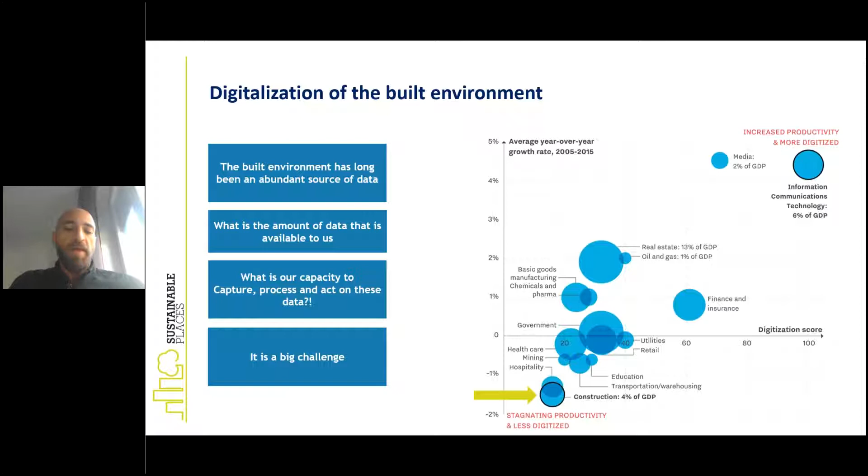And of course the European Commission is realizing all of this. So to tackle these digitalization issues, and also to achieve industrial leadership, they funded a lot of projects targeting these issues, especially digitalization and energy efficient renovation.

And today in our workshop, there are 9 of these projects, in the framework of the Horizon 2020 program. They are all funded to tackle and deal with this issue.

The first 90 minutes will be a presentation about the projects, and then we will go through some of the state-of-the-art tools that are developed within the projects.

And then we will have a round table discussion, where you can also participate as well with questions.

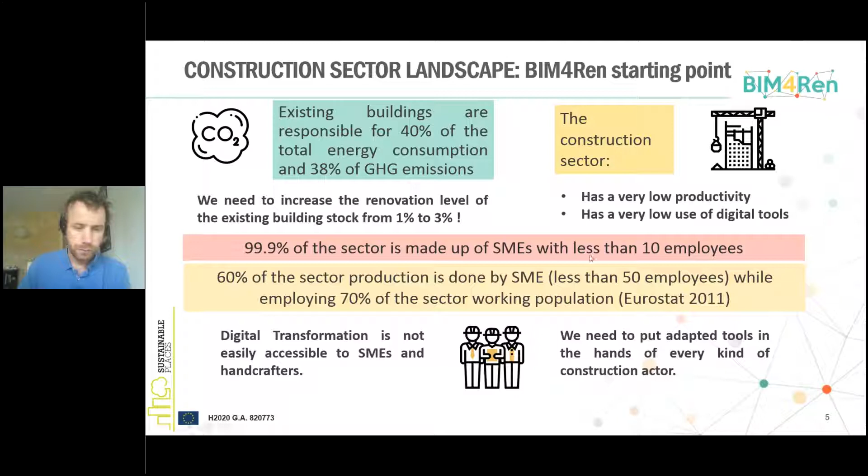And then the construction sector, as said, has really low productivity, low use of digital tools and so on. So for sure, we need to provide those kinds of tools, especially to those companies, to those handcrafters. So we need to put adapted tools in the hands of those kinds of construction actors.

And BIM is clearly one huge potential to trigger this digital revolution. And here, you'll understand that we consider BIM with its two main definitions: first, as this collaborative process to design and manage a building, and then also as a way to represent information - the information that describes the building as it is, as it was, as it will be. So it should allow for more efficient, collective, and integrated design amongst all stakeholders.

So now our concept, pretty short and pretty simple. For all renovation projects, we'll start by an existing building. There's still a lot of information to go either off-site or on-site, but to collect this information about what year it was built, what's the local regulation, what's the current energy performance, geometry, and so on. So we need to collect this information.

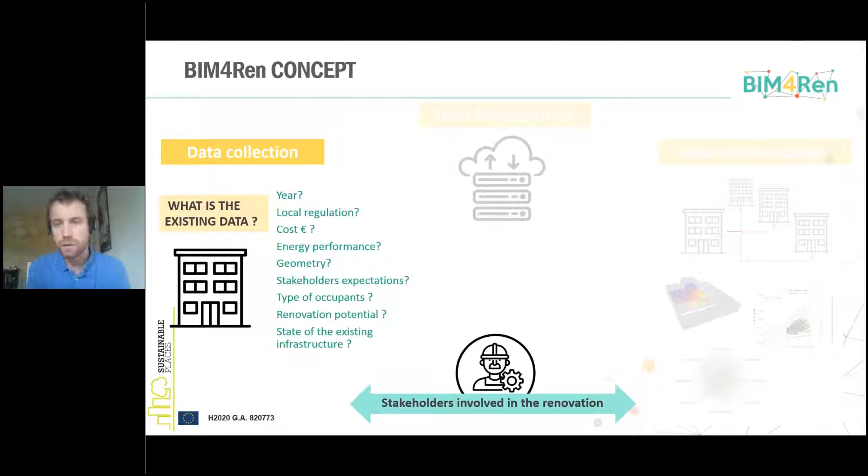Once this information is collected, along the project, we need to manage this information. So we need to create this BIM model. We need to organize it, we need to secure it, and then to allow for its exploitation.

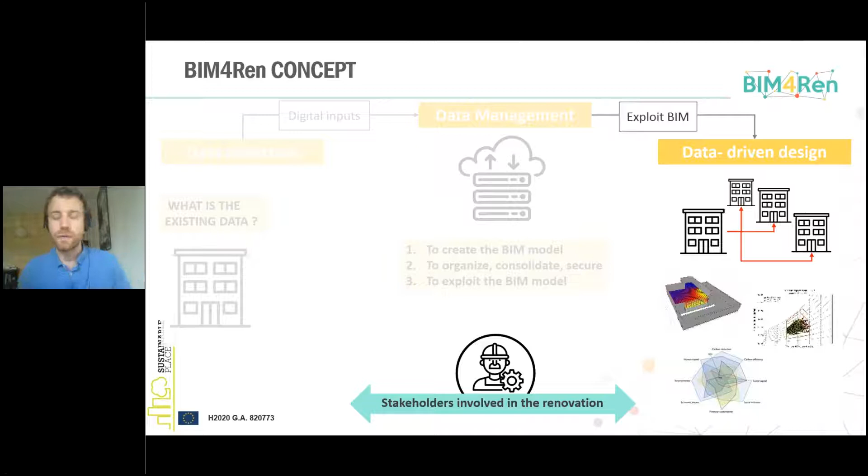And this is a third main step, which is about data-driven design, where we are going to contemplate different renovation scenarios and assess those - and not only just provide a bunch of information, but how to present it so that it helps in the decision making.

So what we want to do is not so much about providing one single tool or just a series of tools to be used, but how to provide access to those tools to a potential user. So in the project, we have more or less 32 developments, categorized along those typologies of data collection, data management, data-driven design for different kinds of services.

And also important is the fact that some of these tools are free, easy to use, while others are clearly more for experts and not free actually. So a wide range of tools.

On top of this more general analysis, we have three specific use cases, one in Spain, France, and one in Italy, which are quite complementary by their sizes, by their typologies, but more importantly by the stakeholders in the project related to this.

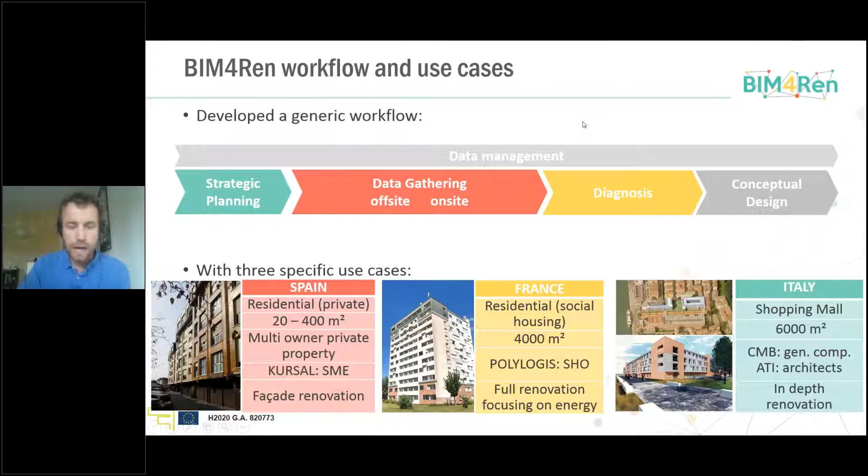So quite complementary analysis. I'll go really quick again as a way to open the door of this conference. If we follow this workflow applied more or less to France, this is how we try to work.

For strategic planning, we have some tools for managing a building stock portfolio. Then for data gathering, in the case of France, we can use a tool called MassDOC, which allows us to exploit existing information, mainly textual information—reports, revisit reports, or documents delivered once a building is built.

So how to scan, extract, and organize this information to identify useful information—this is one of the tools. And then another one is WiseBIM.

Based on 2D layouts, using AI it will elevate this 2D layout into a BIM model, which is enriched. It will automatically recognize certain types of systems, BIM objects, and so we have this kind of information.

Those are two examples, obviously some other inputs coming from different stakeholders. And one other tool, linked to one of the demos that will be done afterwards, is the LOD Lifter, one tool developed by CSTB that will manage the data.

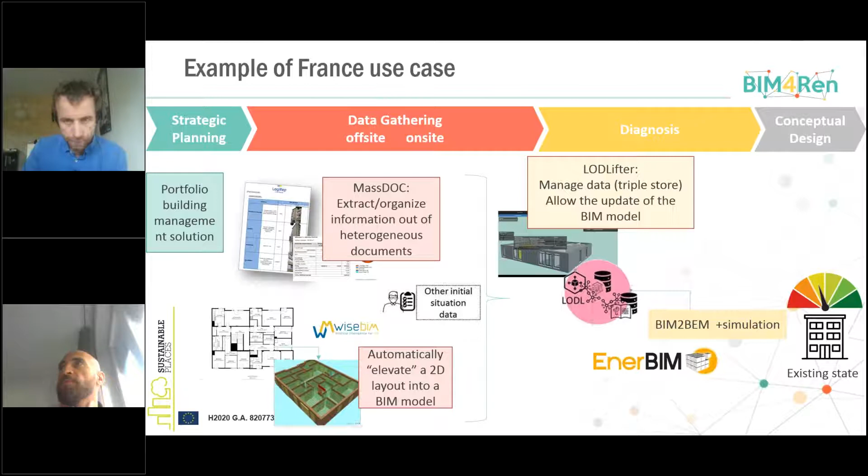So if I put all on the left, and then we consider the design phase, we have complementary inputs such as what can we consider for the renovation. We define the potential modifications, the potential renovation scenarios, which then create a series of simulations that will be run.

In our case, one of the main tools we use is ISVE, coupled with multi-criteria analysis, and also one key aspect with strong consideration to interface—how to retrieve, how to display the data to the decision makers.

So this is more or less what we are trying to do, and as a way to conclude this introduction—this isn't specific to BIM4Ren, but one of the barriers is that IFC as it is now, without entering too much detail, we all know there is information that we cannot store.

So either everyone creates their own models, or this is one first discussion point about extensions and barriers, and how to exploit, for example, ontologies and linked data as one possibility.

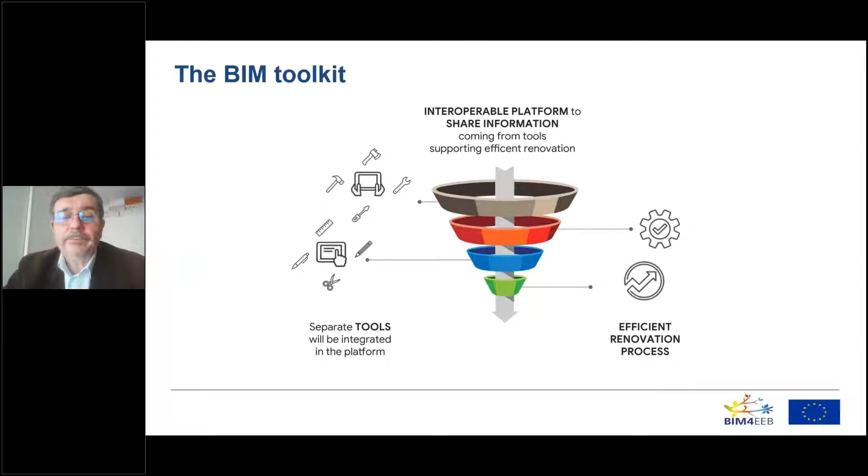So the set of tools is dedicated to the survey for fast mapping of existing buildings, not only for the geometry, but also for the equipment, the lines, and so on in the walls and the technologies.

Another group of tools is for managing automation, building heating, ventilation, and air conditioning information with BIM, and tools for energy analysis, BIM analysis, in order to manage energy information throughout the whole process. Another group of tools is dedicated to construction planning and tracking in order to manage interventions on the buildings.

This involves the facility manager, asset manager, and operators in the management, and on the other side, the involvement of the inhabitants to manage the occupation of the spaces, of the rooms, and for the energy and comfort analysis for performance evaluation.

At this moment, we have developed in phase one the definition of requirements based on the involvement of the chief stakeholders, a big group of construction and service companies, designers, owners, and inhabitants. On the other side, we have developed strong research about linked data and ontologies in order to be used in the management of data throughout the process.

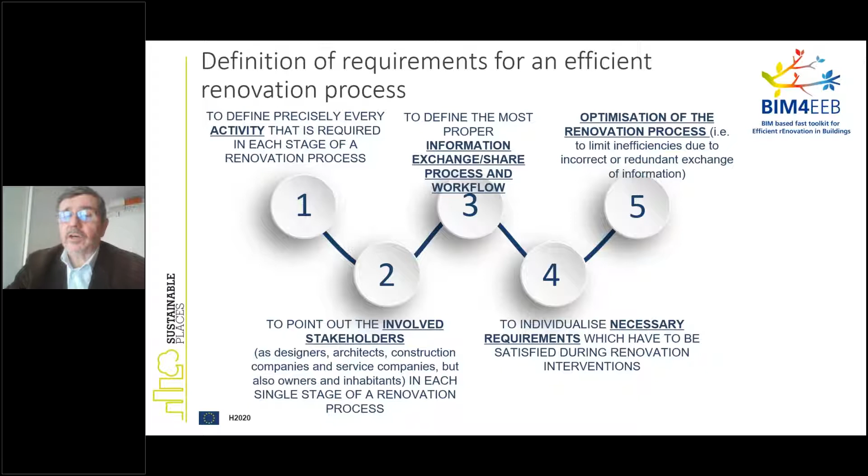And the result is already published as public deliverables on the website, in the form of tables and flowcharts, with involvement of stakeholders and comparing the public and private situation for residential buildings.

A particular specific result is related to the development of the digital logbook, in order to manage all the information for the management of the asset, involving all the information which is needed for the management. And this is the basis for partial enrichment of the IFC files in the BIM management system.

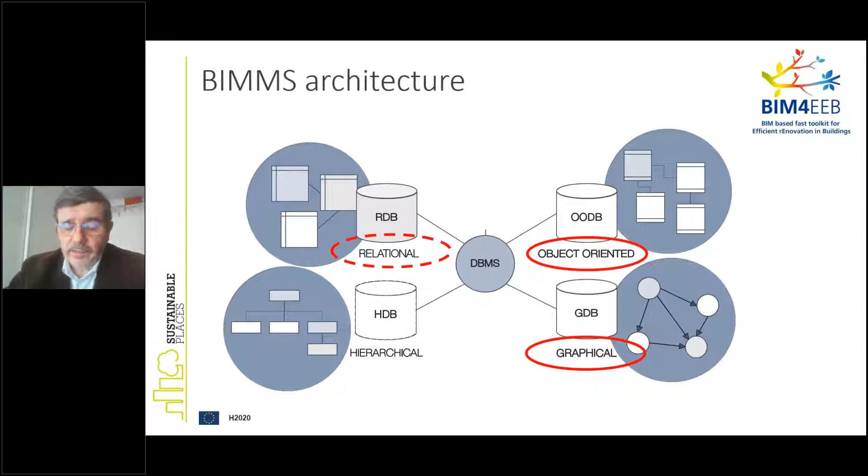The BIM management system has already been developed and is linked with our website, and of course object-oriented with graphical information, but relational, involving ontologies and linked data. And a strong effort is about the standardization.

So the involvement, starting from the Italian UNI working group of BIM, which is involved in the activity of CEN 442 and ISO, managing the information with particular attention for common data environment in agreement with new standards, ISO 19650 for the common data environment. And this is the development up to now.

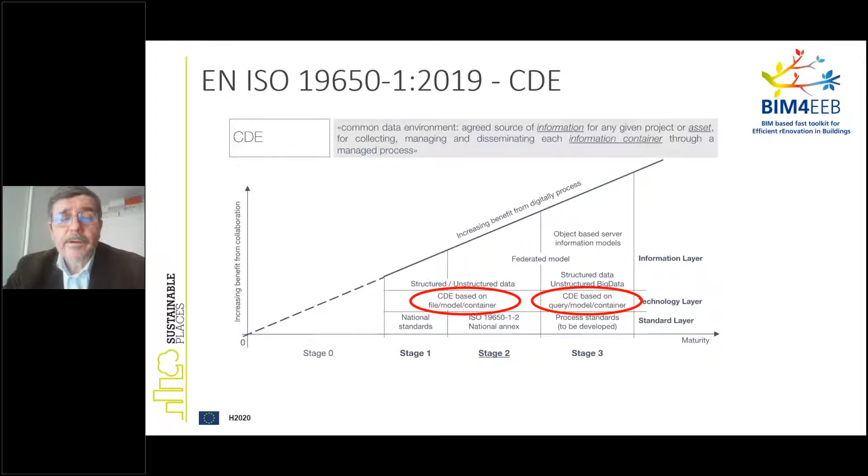And what is now the toolkit is managed by the BIM management system, involving different tools for fast mapping, for planning the activities, the involvement of occupants, BIM for occupants, BIM for energy aspects, Auteras and BIM-CPT for plant and equipment information. All information is given on the website, and if you need more information, there is the email.

And tomorrow we will have the conference of our project in Sustainable Places, and everyone is invited. Later, we will see a video showing the BIM management system in action. Thank you, everybody.

Thank you, Bruno. Very interesting work, especially about the logbook and the standardization. We will speak about this maybe later in the round table. Now I will give the control to Timo, who will speak about the BIM Speed project, which is also a sister project of BIM for Ren and BIM4EEB.

Right, you should have the control now, Timo. Do you see my screen? Yes, okay, perfect. Let me go to the presentation and start it. Oh, need to move that control thing. So now the presentation started, I hope.

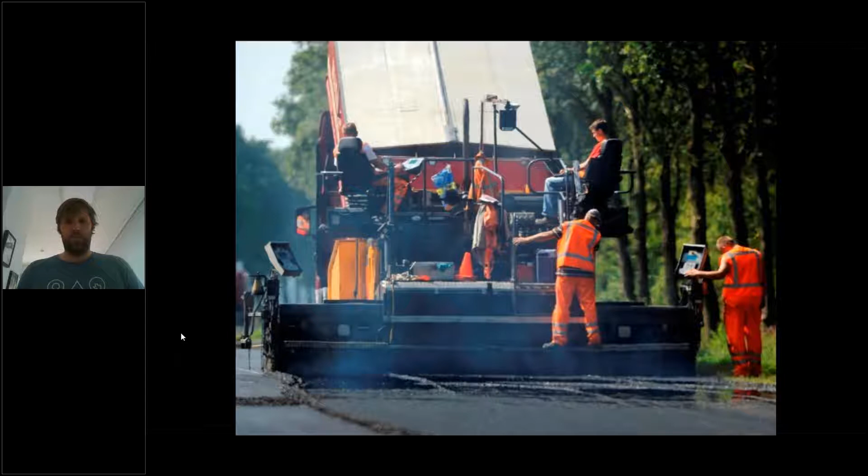And then, of course, there's a lot of work to do because the BIM speed highway is not paved yet. So in the first two years, and probably continuing in the next two years of the project, we spend a lot of effort paving the highway itself. Our major tool for that is the BIM Speed platform.

The BIM Speed platform is based on the French Kroqi BIM platform, and it is really a central repository for all the information. You can store all types of information there, files, and we add new services, so you can actually build services on top of it. Down in the corner you already see a couple of services, and it has an open API. The idea is that we can build up this platform along the project, and then allow smart and innovative software companies, including our partners, to tie in their BIM tools. The Kroqi platform, or the BIM Speed platform, will in the end provide this information highway where all different people who have tools to integrate, all users of information on the project, can tie in and manage all this information to get a smooth ride.

And then, of course, we need to kind of concert how people race on the speedway. So we are working on creating general rules, and also tying other things into the platform that can concert all the information around it. At the center you already see the buildingSMART sign, so we of course use the IFC standard, but around this IFC standard we're developing different ontologies, like the RenoInst ontology, thinking about the knowledge you need to install components; the LCAC ontology, where we want to formalize the knowledge you need to do a real LCA/LCC assessment; and the BIM Reno ontology, where you need to think about energy modeling and what you need for it. On top of that, we are integrating existing standards, ontologies, frameworks and databases like CityGML and gbXML. We have integrated different weather services, which is of course very important for energy simulation. We integrated ThingSpeak and an IoT platform into it, and in the end we also provide guidelines and a BIM passport for projects, which can track the information you have for a project over time.

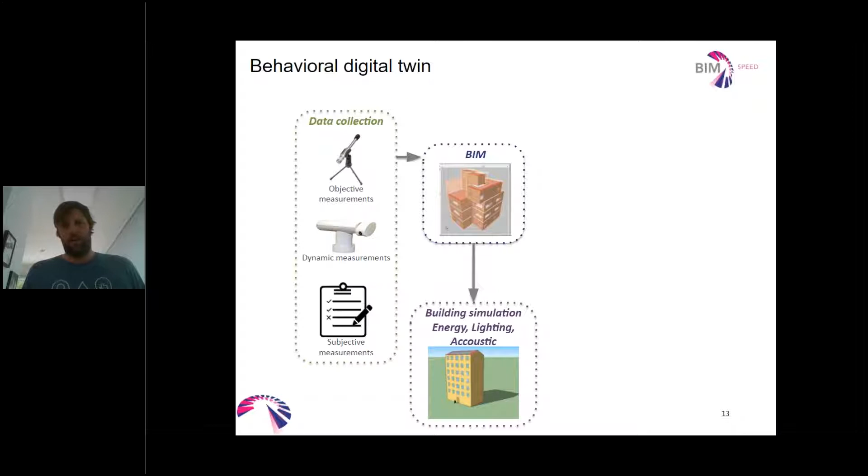Most digital twin approaches do that, but on BIM Speed we move further because we link this to building simulation energy - and by building simulation we mean not only energy but also lighting and acoustic simulation. This helps us understand more about comfort, essentially creating a digital twin based on a building simulation model that is calibrated according to the data. This allows us to digitally twin the behavior of the model, and then do predictions that help develop better renovation scenarios, and provide evidence during design phase on which scenario will have the best impact on the building.

A couple of things we're going to do as we move forward. This is mainly all research work done, and in the second part of the project we want to move more towards innovation. One thing we want to start, and hopefully it will be big and work really well - in 2021 we want to start our BIM Speed competition.

The BIM Speed competition means we want to have projects that renovate, use BIM, show how they use BIM, illustrate how they use BIM, ideally use our tools, and they probably must use our platform, because we need to collect data from them to rate them. This will be open for all organizations and building projects in Europe, and we hope we can make a big impact.

It would be great if you want to join the competition - we will announce it widely. If you want to understand more about the project, go to our website. If you want to stay engaged, register for our stakeholder community. And if you have questions, you can always contact me. Hopefully that was a good first insight introduction to the project. Thank you for listening.

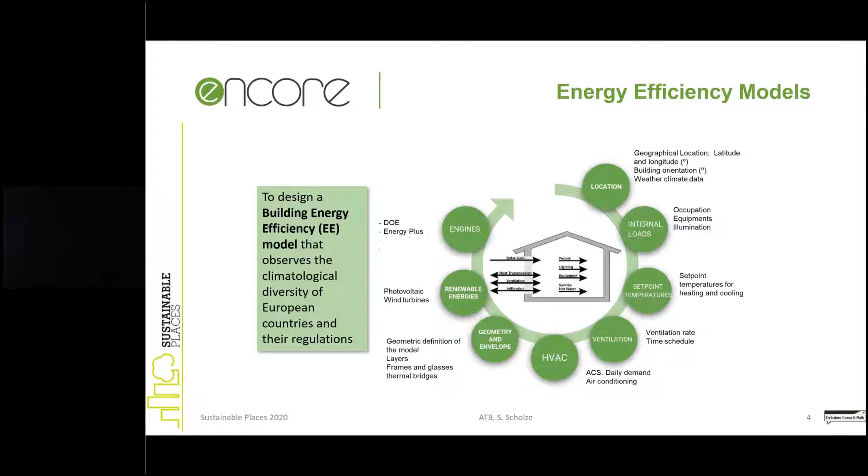Similar to the baseline, we see that we need comfort models. Comfort is really something subjective, but the objective is to design a comfort model that also observes diversity in European countries, taking into account indoor air quality, thermal comfort, acoustical comfort, visual comfort, and energy efficiency. Especially thermal, acoustical, and visual comfort are very subjective. This means there's a clear need to involve real dwellers in order to be able to make such simulations.

These models we see as a baseline for the tools. When we look at the BIM Cloud-based solution, the objective is to design a BIM Cloud-based solution with features and services for all stakeholders in the renovation lifecycle of projects.

What does this mean? I think most of us know the key problems. The key problem is data acquisition in the beginning — often you do not have a BIM model, and it's not too easy to create these models. Therefore, we have tools for data acquisition, surveying with LiDAR and photogrammetry, automatic semantic segmentation and classification, and then tools to generate such BIM models in an automated way, and tools to enhance such models with additional BIM resources. And of course, as I already said, energy efficiency and comfort simulations.

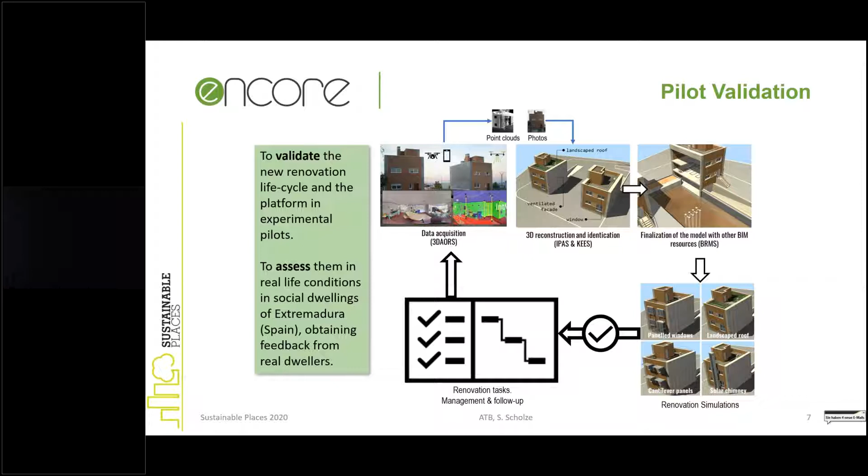I wanted to go into a bit more detail into one of these applications — data acquisition using LiDARs, and how to create an IFC BIM model based on these point clouds.

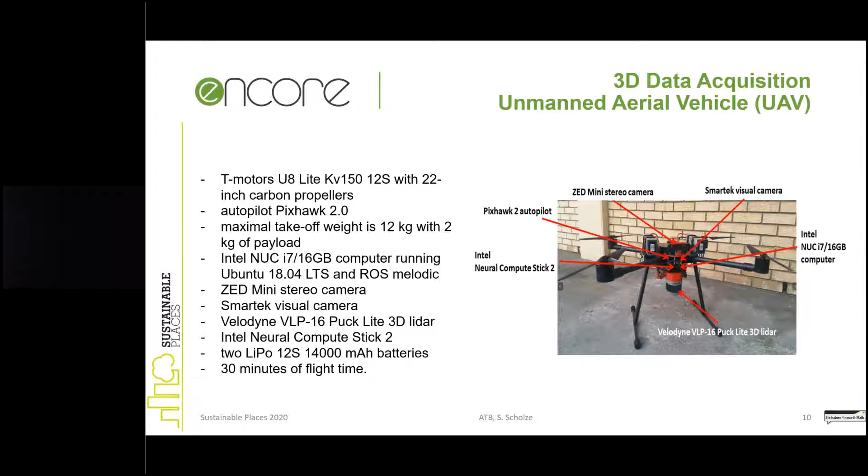With this drone, you can fly around the building to create a point cloud. Here you can see a screenshot example of how this drone is manually flown around the building.

And now I hope that this is working. Can you see? I hope that you can see the video. Maybe one can quickly confirm this. No, we cannot see the video. Oh, you cannot? Okay. Can you see it now? Oh, you can? Yes, yeah.

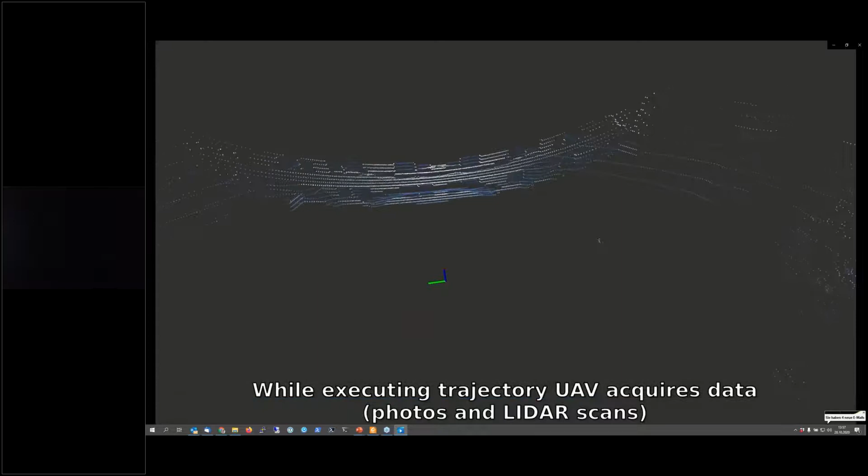You can see here that the drone is flying around the building. While the drone is flying, the UAV acquires data — it takes photos and LiDAR scans. Here you can see what this point cloud looks like, and you can see the drone flying around. This data is saved on the drone, and after the flight we can extract the data from it. You can identify the building, but you can also see that this is still quite far away from an IFC building.

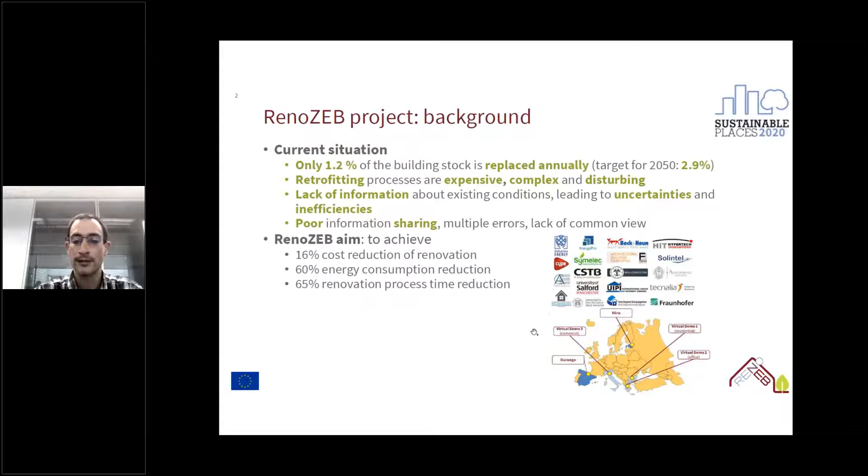So what the project aims to achieve is these figures here in cost, energy reduction, and also reduction in time in the renovation process. To do so, this consortium has joined the project. This project is not only about software or tools, but as you can see here, the proposed solution is oriented around 5 points, which can even be reduced to 4.

One is the process, to define a decision-making methodology. Then with that, to develop plug-and-play envelope solutions for renovating real buildings, which we apply in real demo cases. And then development of different software tools for simulation, monitoring, and knowledge-based systems, which all collaborate around a central cloud platform, the RenoZEB collaboration platform.

One key aspect is to develop solutions that provoke the lowest disruption possible - plug and play products for the facade, that should be easily replicable and adaptable to different markets around Europe. One important thing is that the renovation should increase the property value as one of the main KPIs.

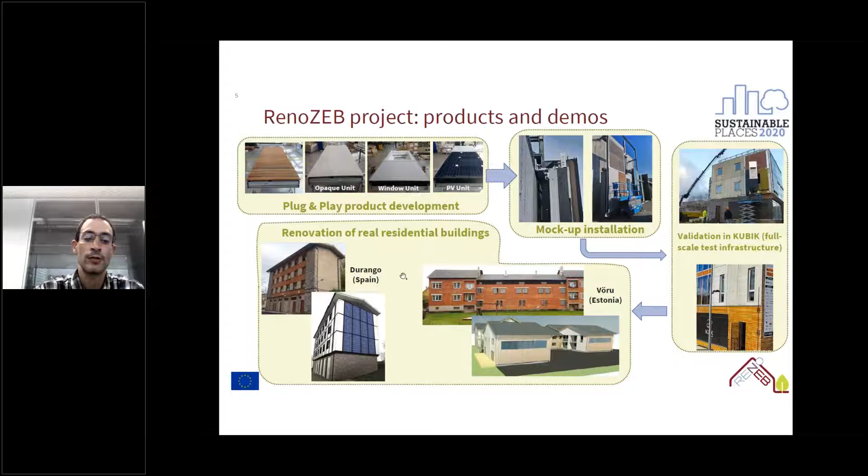We can see here the products and demos we have developed in the project. We have developed different units for the facade, some opaque units and some units with built-in windows embedded, even with photovoltaic units provided by several providers like Focchi in Italy or Bach Heun and other providers in Europe. Then we have made some mock-up tests in laboratory, and in a real scale building we have at Tecnalia, the KUBIK facility, and they are tested in 2 demo sites in Durango in Spain and Võru in Estonia. That's more or less how they will look.

About the tools, all the process is triggered or managed by different sets of tools. CYPE is a software provider in Spain which has provided tools for the different steps of the process. Starting from the acquisition with the point clouds, they provide a tool called IFC Builder to create a BIM model based on this data. Then a configurator which, on top of the BIM model of the existing conditions, lets you easily draw and configure your solution with the available products developed in the project. And then the different simulation tools like CYPETherm, budgeting tools, job control tools, and so on. So we cover the full range from data collection to logistics.

Then we have here also a knowledge-based engine, which is still being developed. The idea is to support in early stages decisions about which is the best option for renovation of the building, and how the value of the building could increase, by analyzing huge amounts of data like climate data in a given location, or EPC certificates that in some countries are also available to query online.

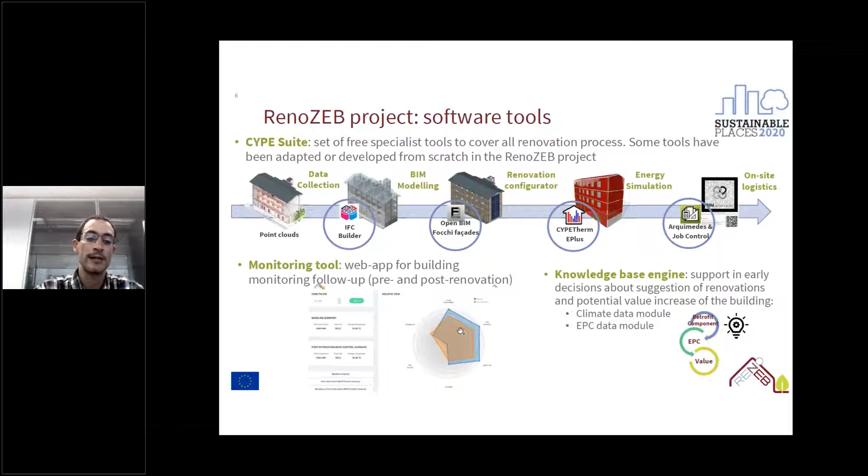So making all this data available, the knowledge base suggests some scenarios or some renovations. And then a monitoring tool which allows you to follow up with some sensors the renovation and compare the pre and post situations and all the gains or savings in different KPIs. All this is coordinated in the collaboration platform, which is developed by Tecnalia.

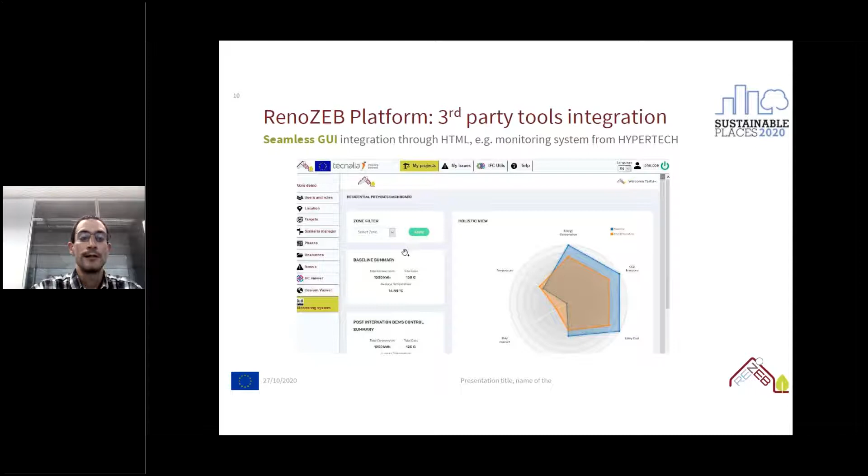And with all this information, we can create different scenarios. It's quite similar to the previous presentation: we can make a ranking or select which are the preferred KPIs for the project, and depending on the ranking, some scenarios are scored best or worst.

In order to make this communication, apart from the REST API, we have developed interoperability between IFC and simulation tools. The CYPE tools are based on an internal engine based on Energy Plus. They take the IFC, run the simulations, and then we have routines to read back the results and merge the high-level simulation results back into the IFC, to visualize them in a more intuitive way.

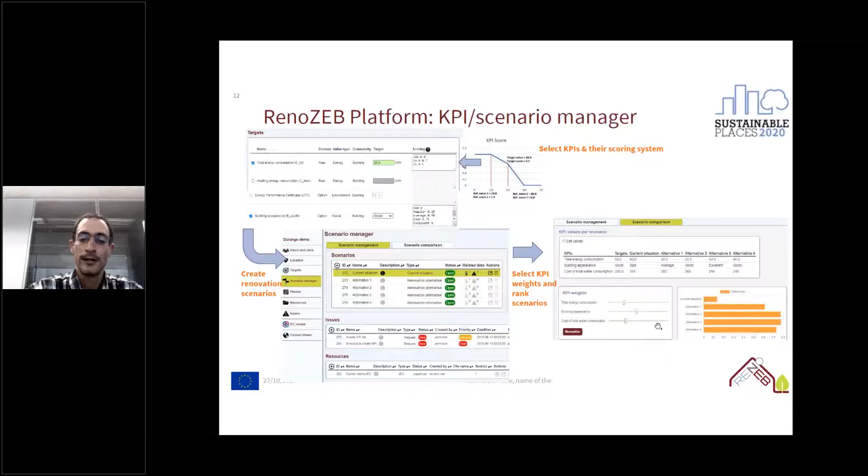And then, in order to compare KPIs of very different natures, for example consumption with water or with appearance, we have a method for normalizing all these KPIs between 0 and 1. So the consumption is normalized between 0 and 1, following a configuration that can be done by the user in this interface. You can tell which is the best possible value of the KPI and the worst one, and even all intermediate values, and according to the results, the normalization between 0 and 1 is made here.

This is also the same viewer here on the left. This is a zoom of this IFC viewer. It's an embedded IFC viewer in the web. We use WebGL technologies and JavaScript technology, so you don't have to install any plugin. We automatically import IFC models.

We can even create IFC models from a district scale and make queries. We have interfaces to query different properties in the IFC. For example, select or paint in red all the spaces where the use is not residential, or where consumption is higher than 100. So you can make visual queries in the model.

Or even compare, joining in the same viewer two or three or more different models, like the building as it is and the building after renovation, and compare them.

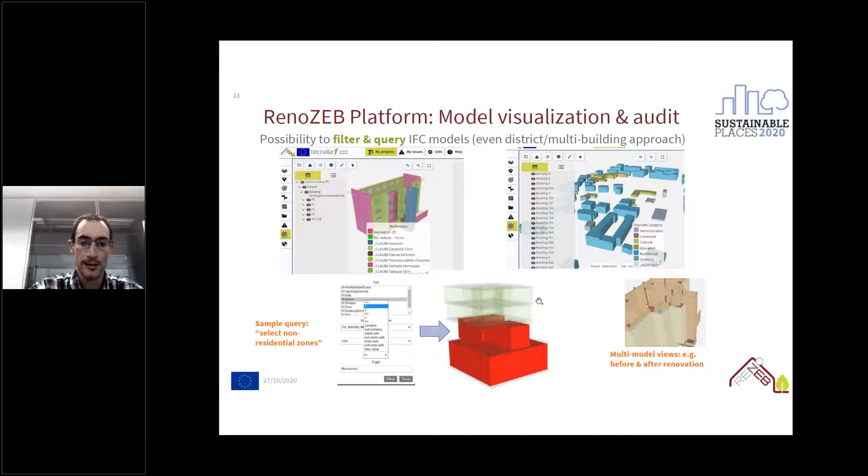As a proof of concept, to show that this tool is extensible and can accommodate different developments, we at Tecnalia also participate in BIM4Ren, the first project explained before. Some developments we made in that project involve an automatic way of generating conceptual IFC models following a parametric approach, for when you don't have anything at all, useful for very preliminary decisions.

This platform also allows extending or embedding other web-based tools as an extension, with the only condition that they follow the same API. So it's a way to demonstrate that results from different projects can be combined into a single platform.

So that was everything from my side. Thank you, and I will hopefully show you something more in an hour or so.

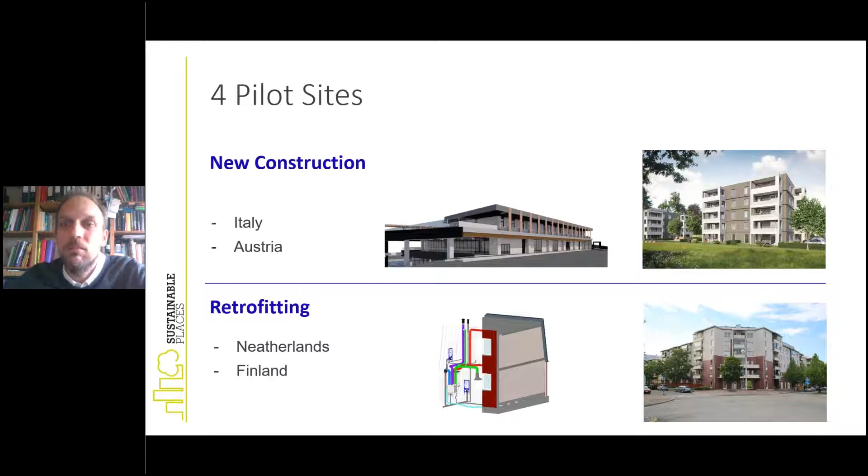So at the end, what we have to pursue the whole time is avoid getting all those digital twins stuck on a shelf, so we can actually use it.

I know this is quite shocking, but at the end it's important to say that in the levels we had, we were targeting methodological levels for the creation of a building digital twin environment, and also an integrated life cycle design.

From the technical point of view, we were focusing on a platform as a service. The idea of moving to a platform as a service is to be able to federate with other platforms, because at the end there are so many platforms - and I'm not just talking about the twin projects here, but about a lot of private and well-known platforms currently flooding the market.

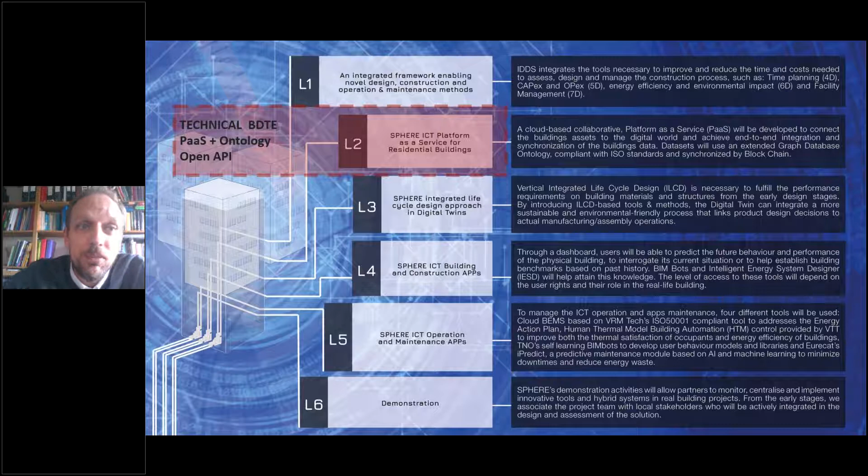In terms of the ontology, we are also looking for a top-down approach for the ontology and an open API.

After this, above this platform and all these integration services or synchronization of the data, we are providing apps which should be the value to the stakeholders.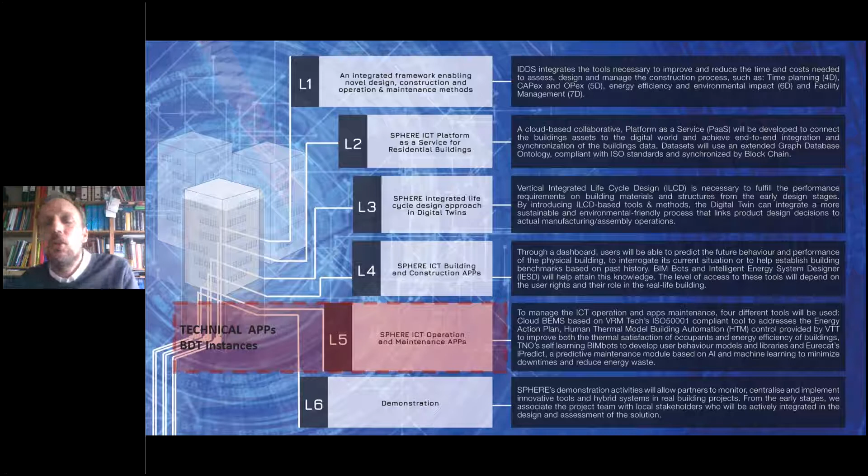Here we are distinguishing between building digital twin prototypes - so we are talking about design and construction phase - and building digital twin instances, so once the handover has happened, once we have the asset information modeling and obviously the demonstrator.

Focusing on the architecture - that was the first image we had - but what we had clear is that a digital twin environment should provide decentralized data storage, services and apps, an agreed API, open data formats, and a life cycle approach. That is crucial at the end.

Sometimes we forget that these digital twin concepts appear as product life cycle management, so we have to start thinking of our buildings as products, as connected and smart products. That's the current architecture which we are working with.

Here you could see the shared components that are inherent to the platform as a service. Obviously we have the data - we have to get the geometric and asset data. This could be highly structured data, and this is thanks to BIM.

This is where all the tools I have been seeing before my presentation are crucial, mostly if we are targeting the renovation wave that I, at least as a human being, am expecting. But we also need to get other non-structured information that we have to keep track of.

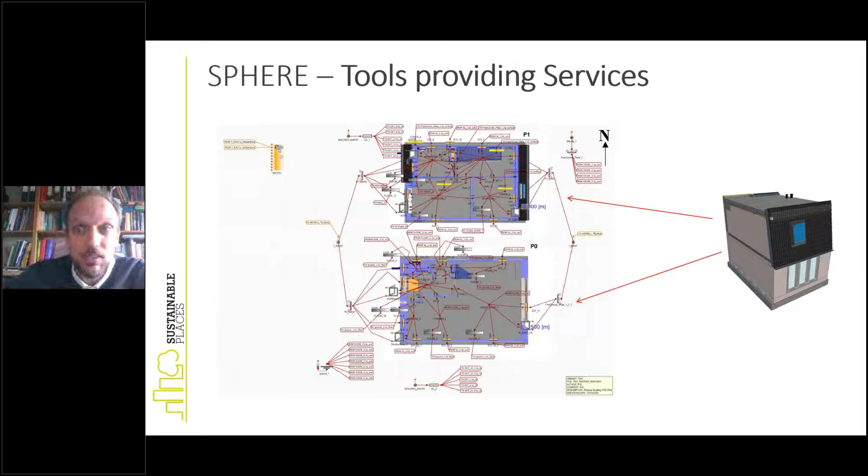For the tools providing services, the analysis - there are two examples of analysis we've done for the users inside the pilots. With only 10 minutes, I don't have time to explain much, but this is part of the services we'd like to provide, which we're testing in TNO's pilots in Netherlands. We can move from IFC to EcoSim Pro libraries - not for energy, but for forced ventilation systems, which we selected for their simplicity. COVID was not present at the time, but nowadays it proves how important this might be.

Actually, we are developing a human thermal model with dummies. We're thinking of even 30 categories, from kids to old people. We're even working on a multiplexer, so we can put people around the buildings, and based on that, we can proceed.

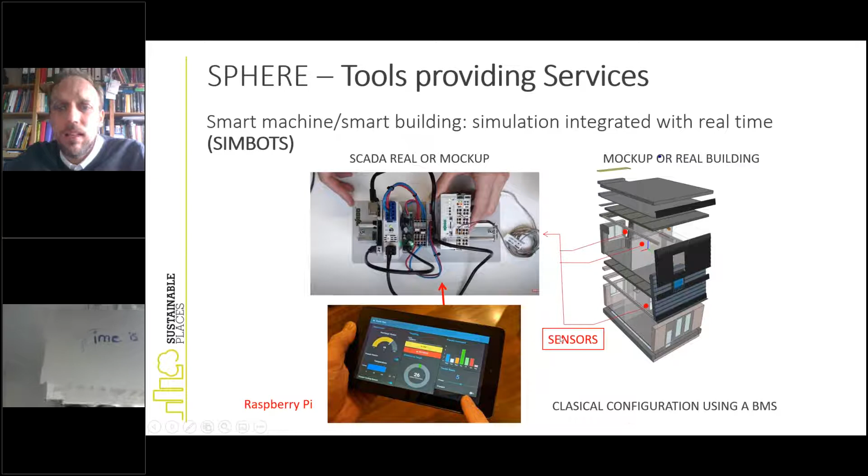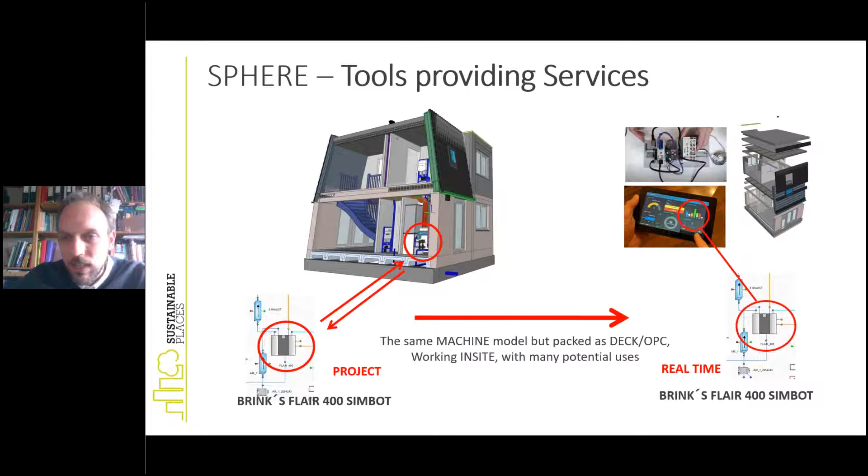This is a classical configuration using a BMS, but our idea is to move toward real-time simulation that could be coupled with the sensoring data, so it could provide not only calibration of our sensorization but calibration of our simulation. It could help us trigger alarms or enable a lot of new uses. Based on TNO's old BIM bots, we are proposing what we're starting to call SimBots - an easier, more reachable way for engineering companies like us to use simulation, which nowadays is too far from what we are doing.

I wish I will not trespass the 10 minutes. I tried to go as quick as I could.

Thanks, Edward. As we see, very nice solutions have been presented, but one of the most important barriers is education.

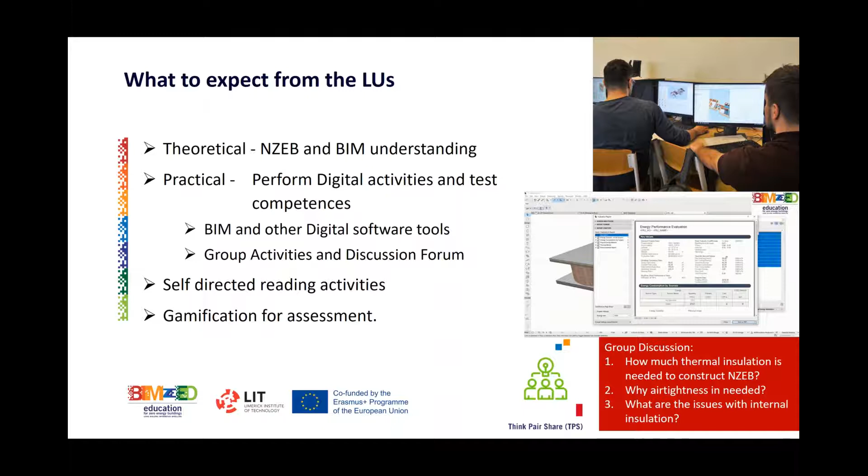There are a number of BIM tools available, but the important thing is all about the principles, and the principles remain unchanged regardless of which tools we use. In Revit, we use that in Ireland and Spain. Allplan is generally used in Hungary, and Croatia uses both. Navisworks seems to be a common one, not for the designers, but for other people within the trades.

Each learning unit has 8 to 10 hours of structured learning and 24 to 30 hours of self-directed learning. The normal ratio here that we use in Ireland for higher education is ratio 1 to 3, which explains the hours involved.

To make sure we have suitable trainers on board, we're holding a number of trainer-trainer online workshops. These workshops will cover 4 topics: an introduction to BIMzED, pedagogical approaches, learning unit content and delivery - remember, there's 12 learning units in total. Then we'll be doing monitoring and feedback, because we have a pre-questionnaire as well as a post-questionnaire at the end of each learning unit, so we can update and improve the process as it goes along.

The learning unit will first provide video sessions for 3 of the learning units, because we have them completed, and then the other learning units will be added before the next trainer-trainer session, which we're hoping will be the end of November, beginning of December. Trainers can choose which learning units they're interested in depending on their target group - they may decide to choose 2 learning units, or possibly even 1. But it should be noted that all trainers must complete learning unit 1, as this sets the scene for the other learning units.

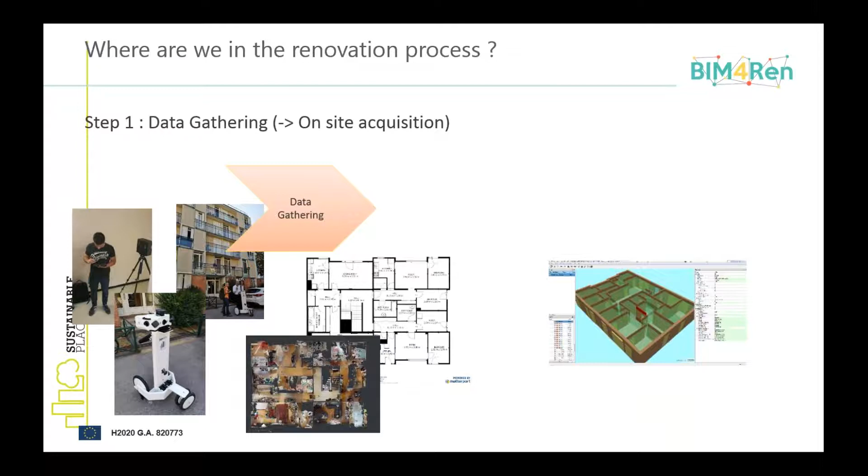We were using cameras, trolleys with LiDAR systems, and also a smartphone to acquire this geometry and related data, through different steps, in order to end up, at the third step, with an IFC file representing this existing building to be renovated. This is where the LOD Lifter takes place, as a fourth step in this data gathering process.

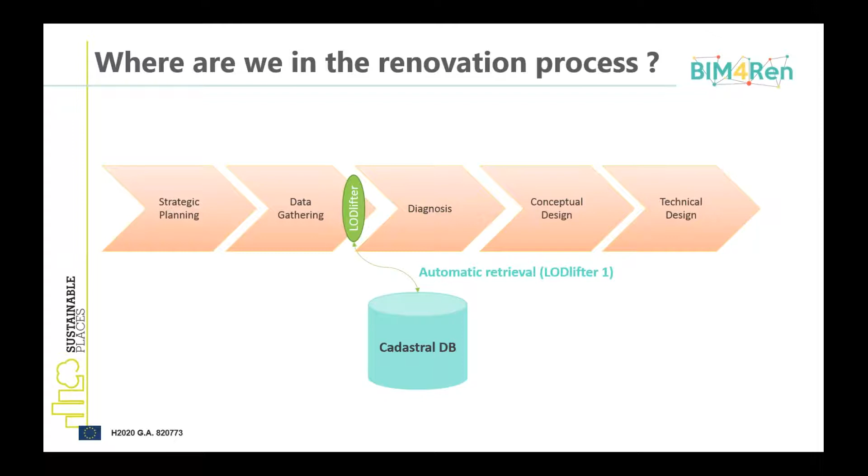In fact, the level of detail of this initial IFC file was very poor, and the idea of the LOD Lifter is to enrich it in order to make it rich enough to be used by simulation tools. For that, we have developed two main functionalities: one is an automatic retrieval of information stored in external cadastral databases, and the second is to replace the poorly defined existing entities by new ones taken from catalogs.

These catalogs are produced according to the recent ISO 23386 standard. So just to recap before the demo, the ambition of this LOD Lifter is really to bridge the gap between poorly detailed IFC files generated via scan-to-BIM technologies or other technologies, and the simulation tools that need very specific information to perform analysis. It should also be an online service available via our one-stop access platform, and you will see we are using Kroqi.

The functionalities of this LOD Lifter are mainly automatic retrieval, connection with external cadastral databases, and also the ability to replace existing elements with new ones taken from catalogs, also developed in the frame of BIM4Ren. Everything is done in a linked data environment, so everything is stored in a triple store.

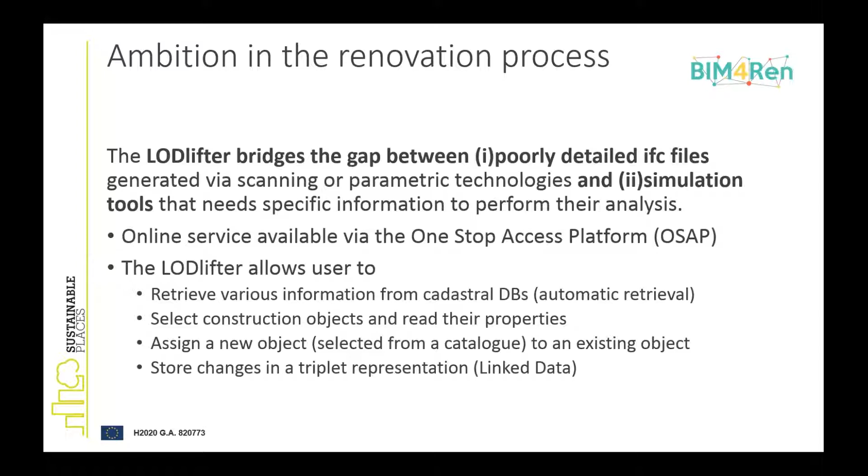So the demo will be very simple. We will open the original IFC file that was generated from the first three steps I just described, and then enrich it with cadastral information, the LOD Lifter one. We'll see it's very raw for the moment, still a work in progress. Then we will use the second functionality, the replacement of the original elements by new ones with more details coming from catalogs.

So now it's a live demo. I hope I won't go for a blue screen. Here is my one-stop access platform, and maybe some of you will recognize the Kroqi environment. Myself or colleagues of mine have already uploaded some files here, and I have this one, which is the Résidence du Nord, the name of the French pilot, here as an IFC file. I will now use the LOD Lifter to enrich it, so I can click here and access the services available under my platform.

So I have a list of services available, and I will choose this one, the IFC LOD Lifter application. I have already opened it, so here it is. This is my LOD Lifter environment.

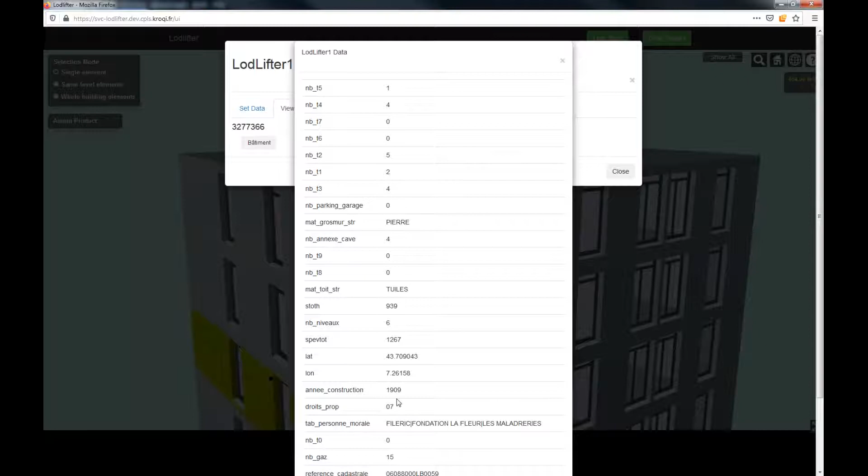It's in French, but we can see a description of the number of flats inside the building and the layout of these flats in terms of number of rooms. We have the composition of the load-bearing walls, for instance stone. We have the roof material, tiles. We have the total surface, the number of stories, and the year of construction. It's not really explicit for the moment, but I have retrieved a given set of information about my building.

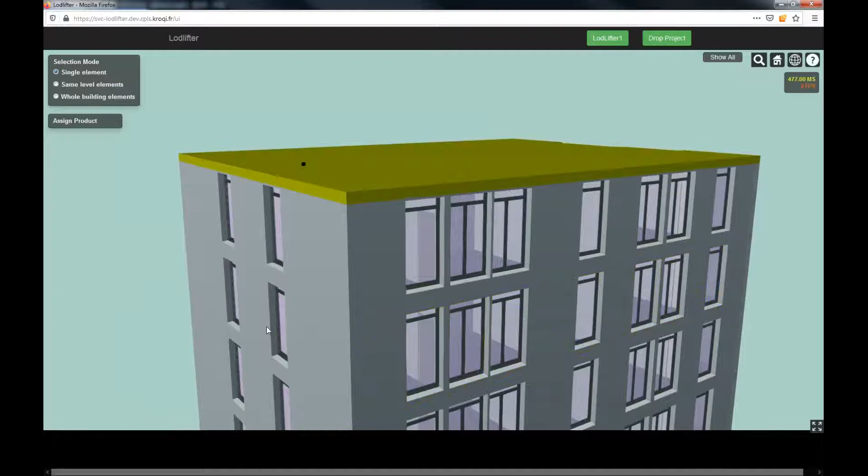Now it's the second step. I would like to enrich it. So this is my initial building representation. I can click on different entities—for instance here I have selected a window. On the right-hand side you have the actual description of this window, very poor. It's an IFC window with a GUID and a name.

On the left-hand side, a kind of catalog has appeared where I have other windows, and I can select one occurrence saying I would like to replace my actual window by this one. So I assign this new window, and you will see the properties now are richer than the original.

I can do the same for the wall. Because I have selected a wall, you can see on the right-hand side the poor description, only two properties. Now I have a catalog of products corresponding to my wall—it's a list of insulation solutions I can apply. So I can say I would like to apply this one to this wall.

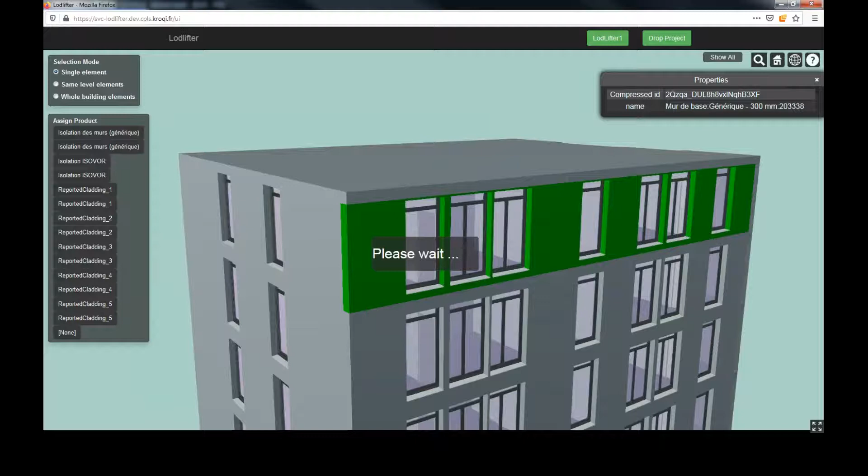Basically, this is done. The properties are there, and as I'm clicking here in this interface, everything is written in the triple store, so all my changes are persistent.

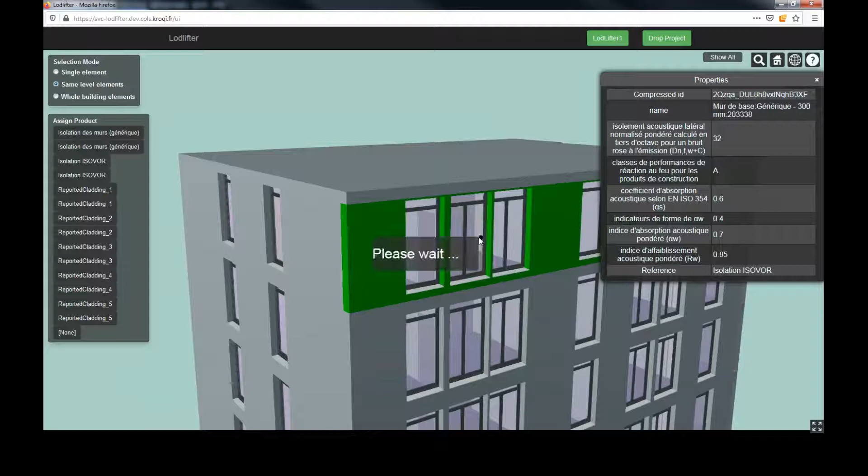From a functionality and usability point of view, here I have selected single elements, but I can also apply my changes to a set of elements. I can select all elements at the same level—for instance, if I click on this window, now all similar windows on the same level are selected, and I can apply the changes.

Apply the changes to the whole set of windows at the same level. So basically, these are the functionalities I would like to present very briefly. Let me go back now to the presentation.

In terms of conclusion, a few words about the ongoing work. For the LOD Lifter one, the automatic information retrieval, we are going to work on the translation of the fields coming from the cadastral database. But also we are going to think about how to exploit this information—what are we going to do with information like load-bearing walls made of stone? Does it mean a certain value for the thermal transmittance or things like that? So we have to progress on that.

The second point is what to do with LOD Lifter two, in terms of export capabilities. For the moment everything is stored at the triple store level, and we would like to make all the changes available through APIs or export formats—we are thinking about gbXML, for instance. So these are the ongoing activities for the coming year. And this is it for me. Thank you very much.

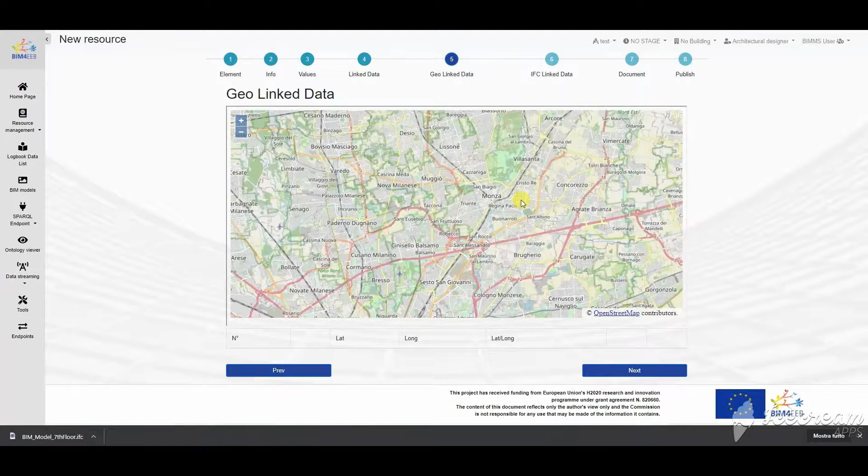In this example, we have an IFC model of the building. Then we can compile the title of the resource and its description. The user can also set a property of an ontology class to describe the resource and its linked data relationship. Then define the location of the resource on a map, with latitude and longitude set as geolinked data. The resource can also be linked to an existing IFC in the BIM management system. Finally, a file is selected for upload and the status is set.

Our resources appear in a resource list where they can be filtered and managed. Some status workflows change from work in progress to shared status after a review session or a validation input. From the list, a resource can be selected to see its detail, following the same wizard seen before. The resource file can be downloaded and opened on the computer.

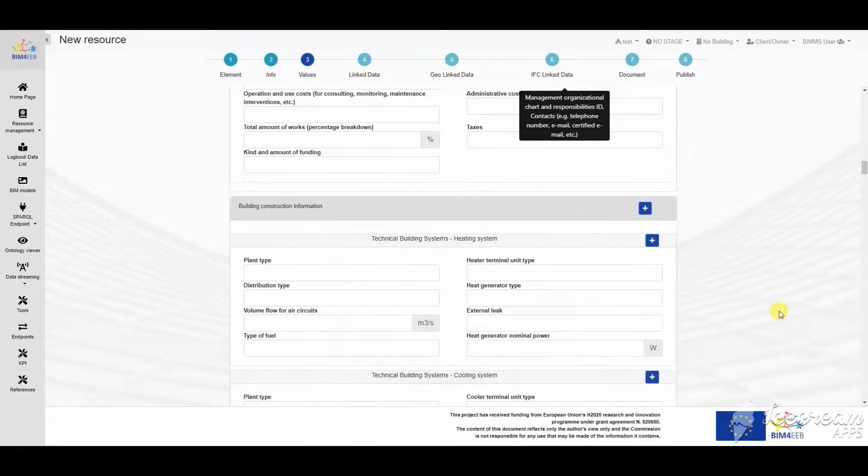There is a set of role permissions on the fields that allow only specific roles to write, and set a read-only mode for others that are not authorized. This kind of setup is defined to make it possible to keep some parties informed while allowing others to edit.

Also, the logbook is a resource and it can be linked with other resources, ontologies, geo-linked data, and will be set with the resource status.

As seen before, a resource can be geo-linked. There are specific functionalities in the BIM management system that show all geo-linked resources created in the project. This functionality allows opening the data to geographical information systems. All geo-linked resources contain information about latitude and longitude set on the resources.

The BIM management system also has functionalities to include information directly as linked data, creating resources that can be directly compiled by the users, assigning existing ontologies, selecting the classes, and defining the properties for these classes.

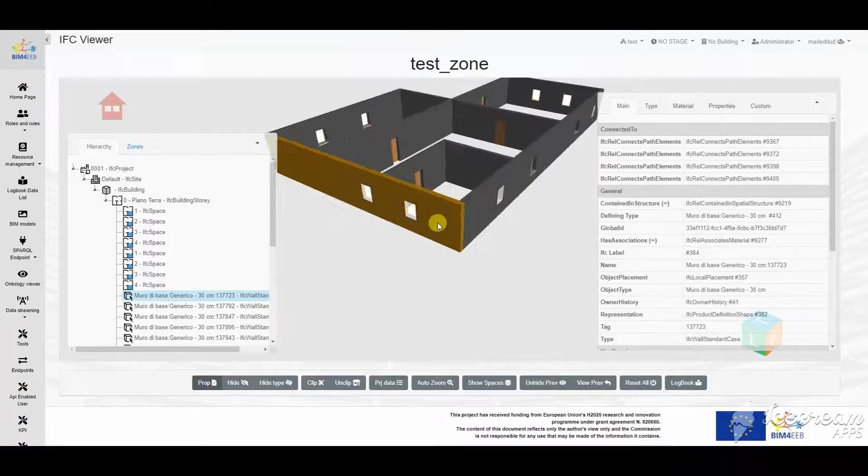Another main functionality is the BIM viewer that allows navigation through IFC models. The viewer allows moving around the model, selecting entities, and checking their properties. A tree view allows checking and selecting items, looking at the relationships between objects, going through the building, the stories, the types, and the single entities.

The right panels show the properties read directly from the IFC file and stored in the BIM management system database. There are also functionalities to hide, show, isolate, and zoom into the elements selected.

The viewer can show the building zones and spaces, very useful for sharing data related to the sensors and renovation works that will be used for the entire BIM4EEB toolkit. A useful tree view allows selecting these zones and checking the data linked to them.

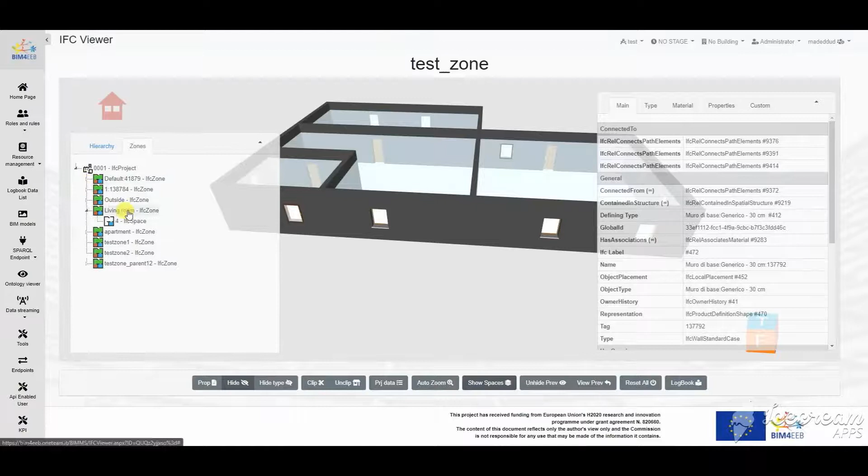For example, the sensor measurements of temperature, humidity, and other metering systems associated to the space, and other linked data that refers to the locations like activities, planning, and so on.

About the linked data, a live SPARQL query is done for the item, and it can show the resources in a relationship with this item. As the data grows, this will be useful to see the relationships between the foundation of linked data concepts.

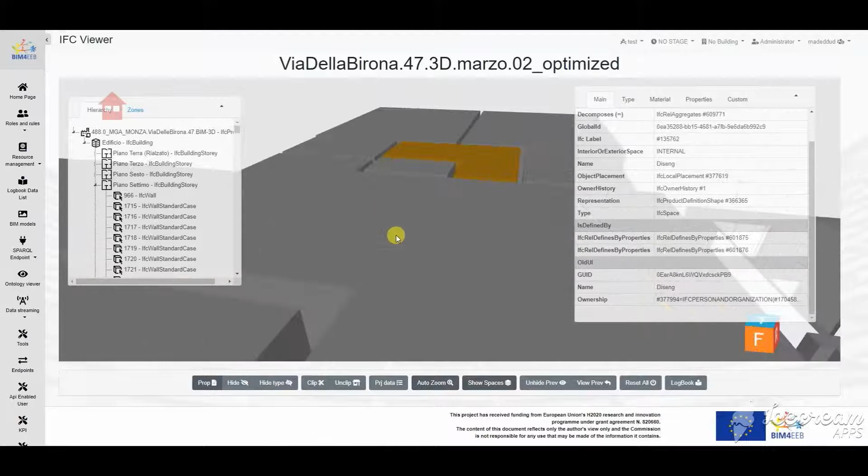A SPARQL endpoint is available in the BIM management system, where the user can find resources by writing a SPARQL query. The result will be viewed as a table, raw data, or a graph, and if the data is related to an IFC model element, it can also be listed along with the related elements.

This endpoint exposes the Virtuoso database and its functionalities. The same queries could also be done by other tools via API calls.

The example shows a query on the model uploaded in the BIM management system, where we are asking about the name of spaces and locations.

The BIM models can be viewed but also downloaded, not only in the original format, but also in two RDF ontology types, IFC-OWL and BOT ontology.

About the ontology, there is a viewer that lists all the ontologies used and stored in the BIM management system. The graph viewer allows seeing nodes and relationships, their properties, and links to the details in the repository.

Ontologies can be added and stored by giving a name, a URI for the TTL, and a URL for the documentation.

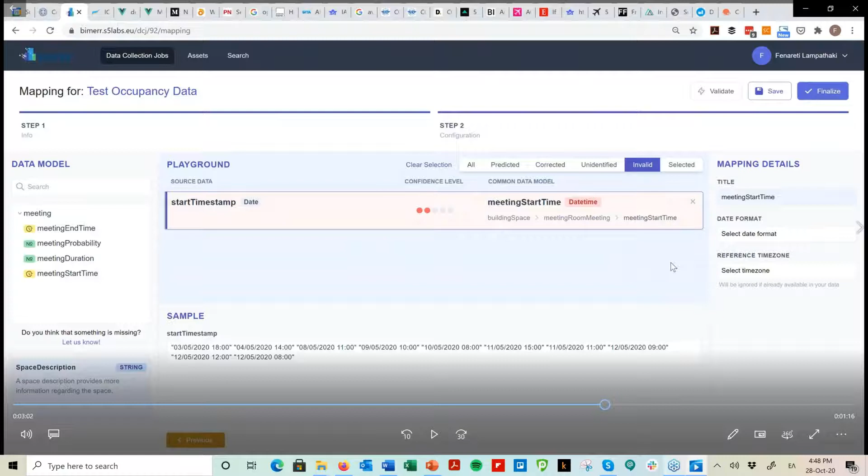A similar situation applies to date time fields, for which I need to provide the date format to be consistent with the sample data I had provided, and the reference time zone, so the interoperability framework can do all necessary transformations on the data uploaded each time, to be consistent in the same date time formats and time zones, avoiding any surprises when someone tries to retrieve the data.

Once this data collection job has been configured, the data provider needs to provide some metadata to facilitate searching for the specific data by other applications and developers. He also needs to define the access policies according to which he or she allows access to the data he has uploaded.

You can see an example of some metadata I have quickly provided. There are some generic metadata, some data that refer to the extent, temporal coverage, spatial coverage, specific building, specific period. I can set many different details.

If I have mentioned that the data set I have uploaded will not be public but private, I need to provide specific access policies both for the users, other developers, and the respective applications. I can define access policies based on username, groups, projects, and so on. And I can see the details at any moment about the metadata I have provided.

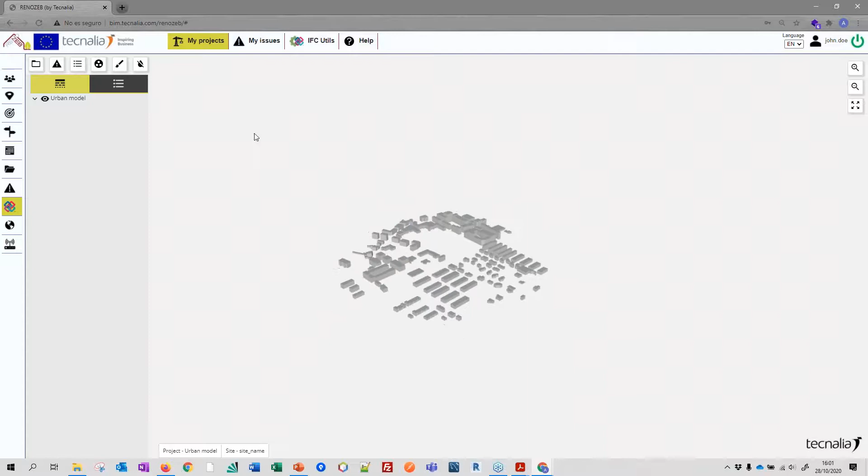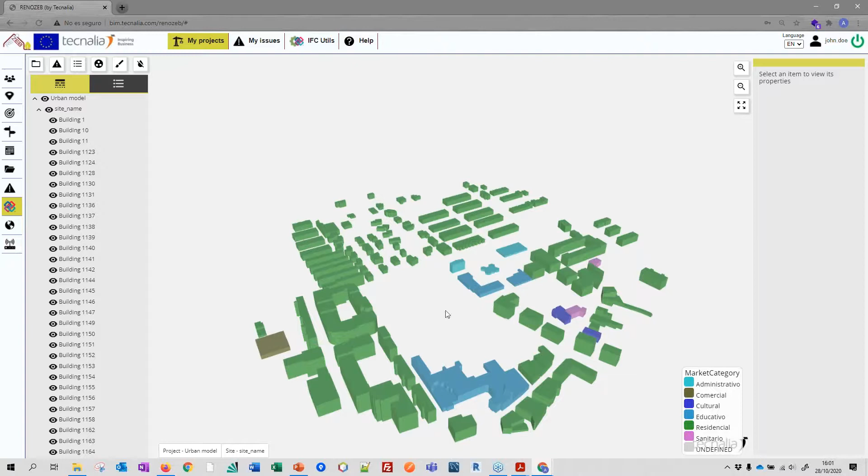If you click here, you can see an IFC model consisting of multiple buildings. I will hide this a little bit. Each of these elements is an IFC building, and with the properties here you can make queries, for example by use or category, commercial, cultural, or whatever.

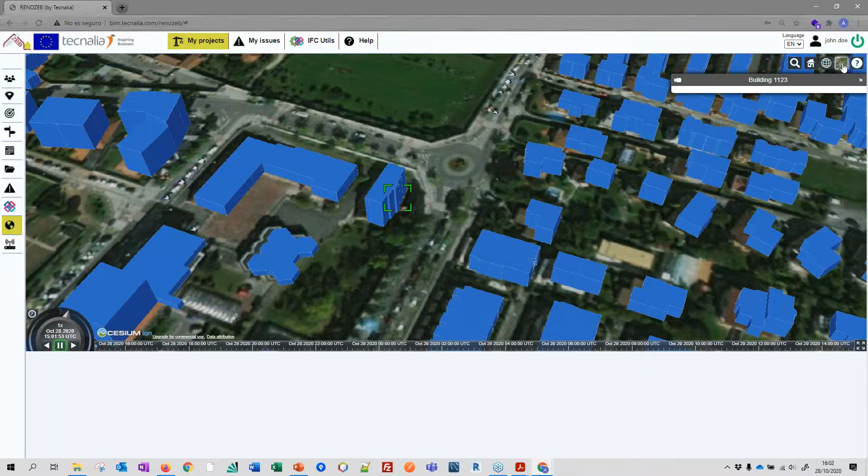We also support a georeference viewer based on KML, so it's the same concept but using a Cesium viewer based on Google Earth. It's the same model, since we have internally an exporter from IFC to KML. So the same model is viewed in the real context. You can switch to the orthophotograph or the street visualization, for example, and see exactly where the building is located.

Then, for the scenarios, as I have mentioned, we have a current situation and different alternatives. For generating all this information, the BIM model has been created by an architect, but for example, to perform energy simulations, we have used CYPE tools.

I think there is some quick video, I will only show about a minute or so. This is a video of a previous training session of the CYPE tool. In this simulation tool, called CYPETHERM E+, based on Energy Plus, we have developed some plugins to the RENOZEB platform where you can log in, and once you do it, it will go faster.

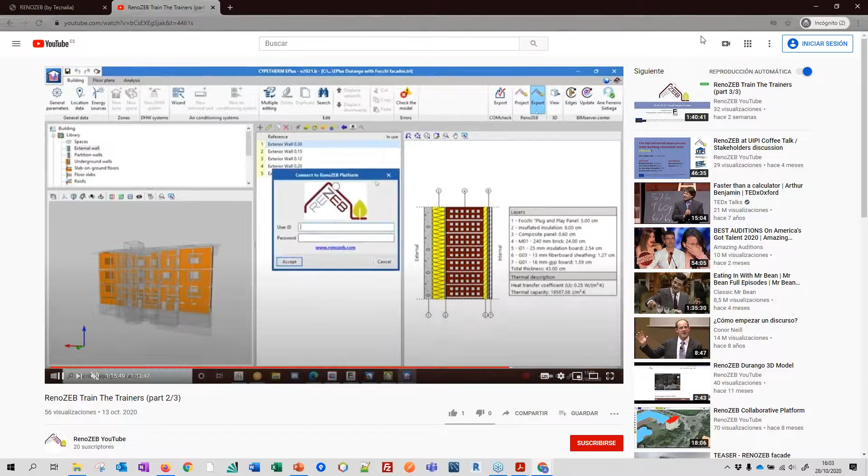You can see all the available projects. Click on one, see the different scenarios and alternatives, download the models, and so on. Once you do it, you make all the calculations, get results, and go back to the platform. It's the same as if you log in here with that user, you will see the same projects and information.

For example, for the current situation, we have here, we also support issues and request management, so we can send different requests between different users. For example, please make a simulation, provide the model, check this information, and so on.

For example, let's see, this is the architectural model before simulation. If we click, we can see it here and make any query as before.

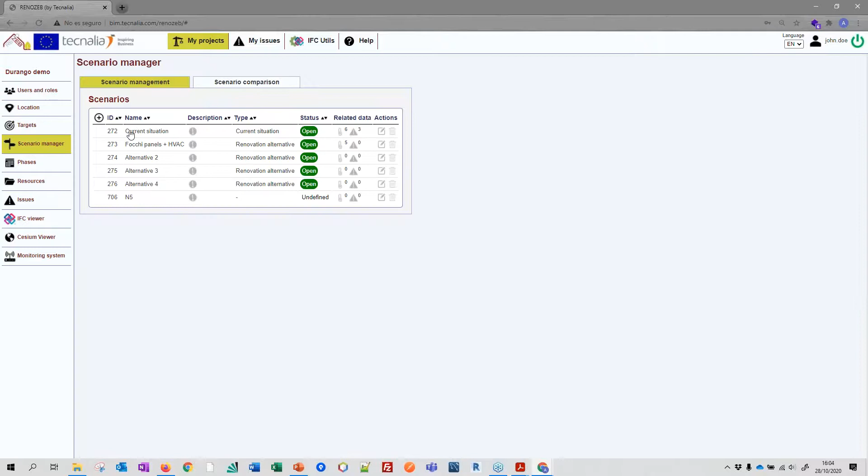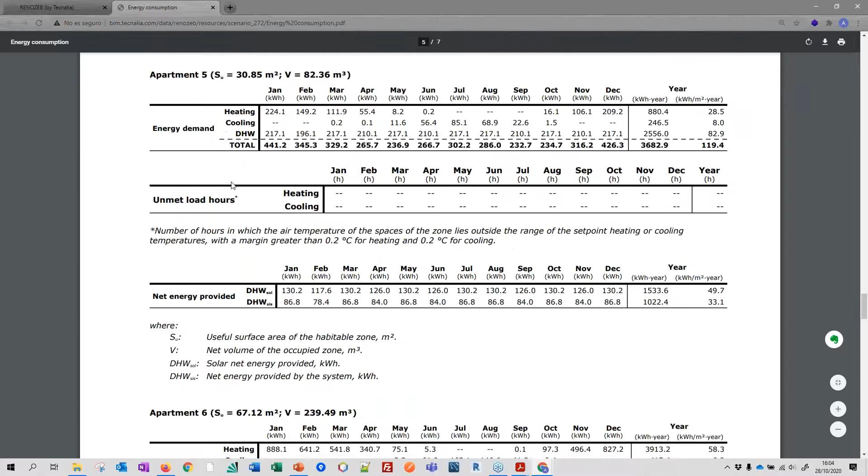After simulation, the information that has been generated is, well, two things. From the simulation tools, we have uploaded the real report of the simulation with all the consumption generated in CYPETHERM, let's make it bigger. So for each dwelling, all the energy demand per type, and then per apartment, and in the end I think we have the summary, which is the same that we have imported in the BIM model.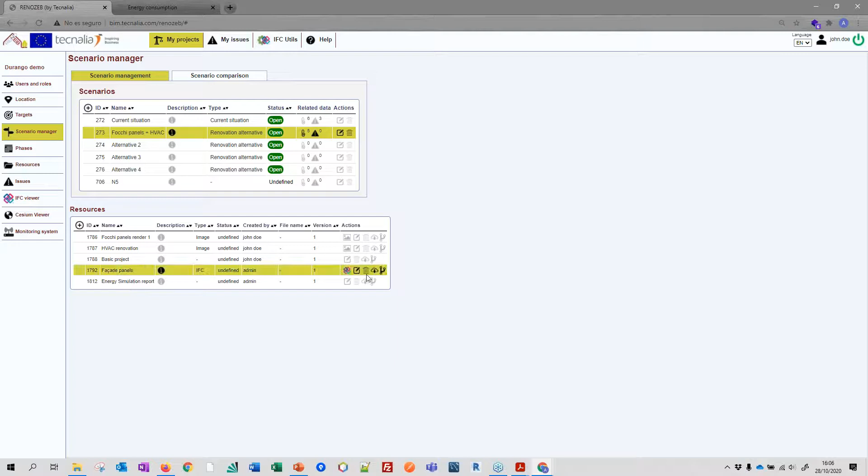So we can create scenarios for after renovation too. In this case we'll have the IFC model consisting of the renovation panels. In the viewer, we can add models in a federated way, either adding a new model to the scene or replacing the existing one. If we add a new model, we see both together - the panels and the building model.

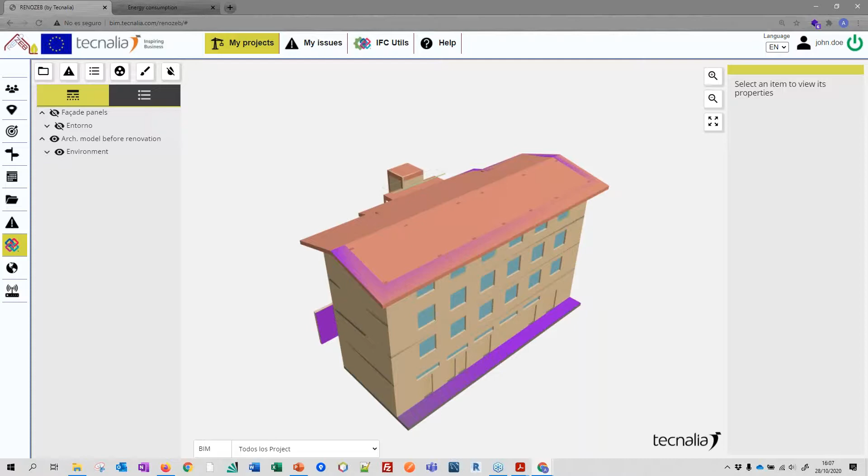Since we're a bit short on time, I'll go directly to the scenario manager. We've already seen the scenarios, and one thing the user can do is in the target part, click the KPIs they want to visualize or compare, set a target value, and scoring.

There's a help document that tells you how to fill in this table. We'd like to do it in a more visual way, but at the moment it's quite manual input of these different ranges. We can have increasing KPIs, where higher is better, and in this case energy is the opposite - the lowest is better. We could have KPIs like temperature or whatever.

In the scenario manager, the user configures the scoring from 0 to 1 for each KPI, and then makes the comparison. For example, if the only thing relevant for us is energy consumption, then we mark everything like this.

Then the second alternative, which has the lowest consumption, will be scored best. If appearance is the only important thing, then this one will be scored best, and you can make any configuration.

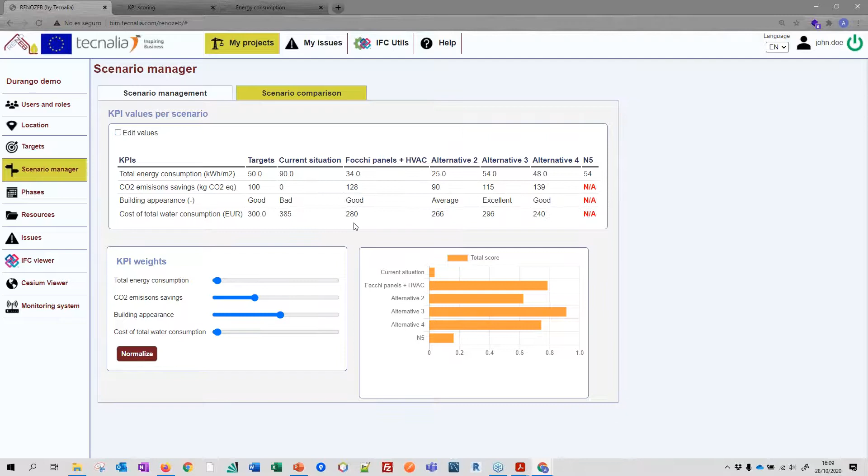In the future, if you want to add a new KPI to the comparison, let's put some random values here, save it. If you go to the comparison chart, you'll have a new KPI, and if you create a new scenario, you'll have a new column, but of course with no value yet - you have to perform the calculations and fill in the table to make the comparison.

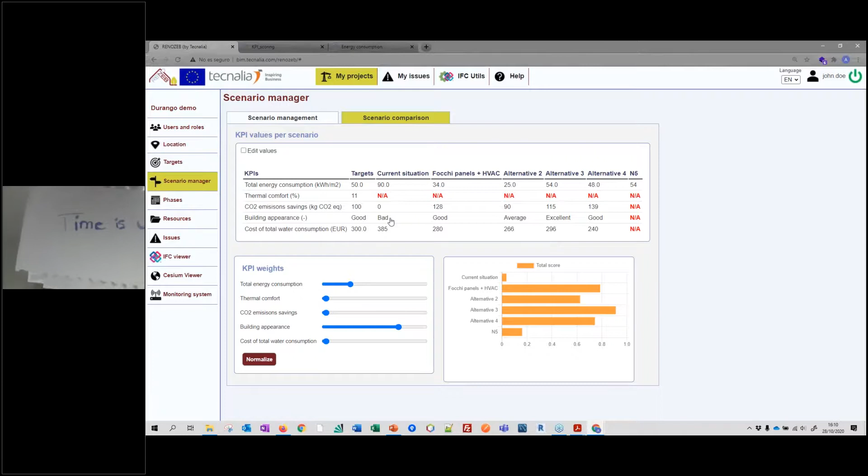What we'd like in the future is for typical KPIs like consumption, cost, and so on, for these tables to be automatically filled in by the tools. But this flexible approach allows you to put any manual KPI and select the values and scoring system to compare between them.

We're also working right now with a knowledge-based engine provided by the University of Salford, which in very early stages can suggest the best scenarios according to building location, climate data, energy certificates, and so on. So at the beginning you can get a suggested scenario, but for the moment you can also manually input the scenarios you desire, go to each one, put the different files, make the calculations, compare them.

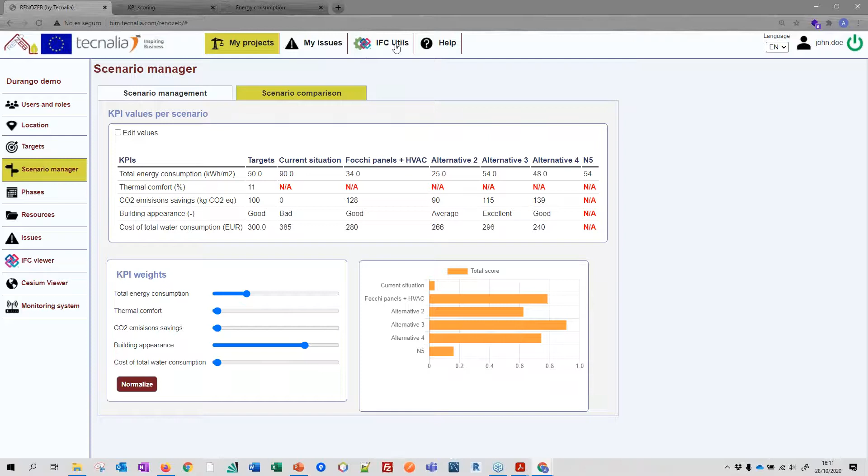So in the future, a more automated approach would be nice. Also, as I mentioned in the utility parts, we've embedded a tool we're creating in the BIM4Ren project that allows you to create an IFC from scratch. You can select a location on a map, even measuring on the map to get dimensions, size, and so on. We also have a tool that embeds this in a GIS tool to create the files we've seen before - but that's what we're working on for now.

Additionally, I have another window here. Another partner in the project is developing a monitoring system to compare pre and post renovation of the building - for example, this is for Tartu in Estonia in this project. It's another tool, but we've embedded it seamlessly in this web application, so you can enter through here and perform the analysis. From the end user's point of view, it's like a single entry point or platform - they're not aware a different tool is running. It's taking some time.

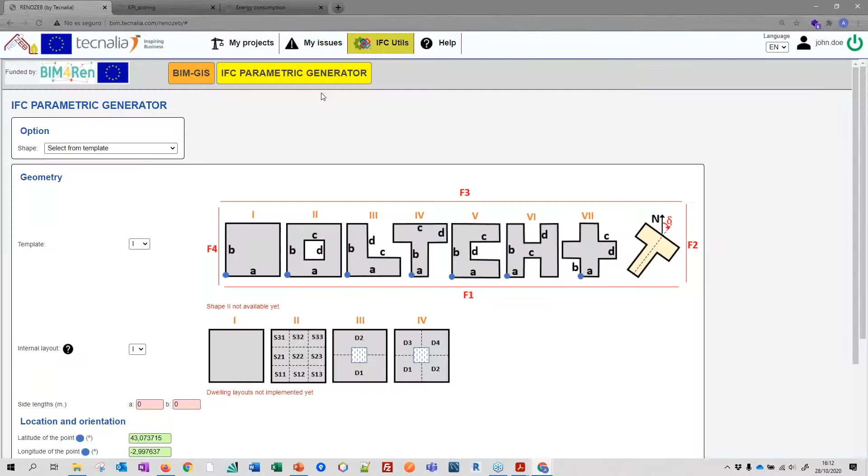Thank you. Okay, thank you. Thank you so much. And Elizabeth, are you ready, or shall I share? Or shall I share Larissa's screen? What do you prefer?

Elizabeth? Hi, yeah, I found out I just closed down one of my screens, so you should be able to see this video. Okay. Can you share me? Yes, there you go. Okay, we can see. Yes.

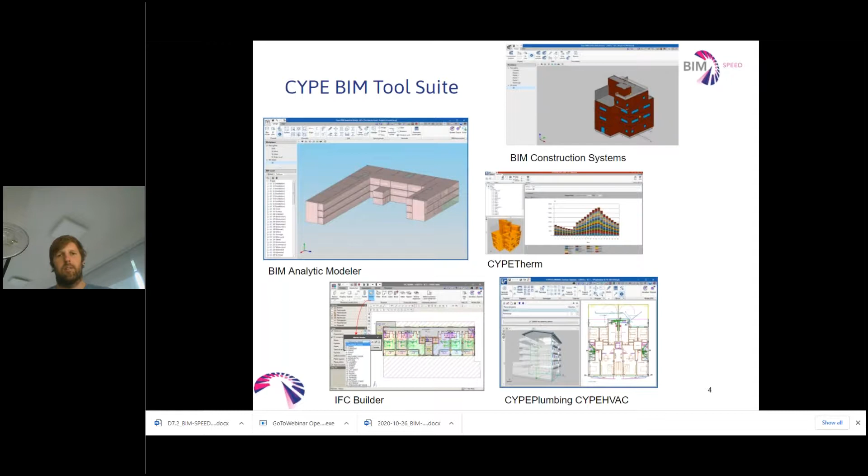So what we work with is CYPE, and somebody showed already CYPE, right? CYPE is a great company, and they already have a lot of BIM-based tools that are part of the project, and we are connecting at the moment, or thinking about how we can connect that to our BIM-SPEED platform. We developed a laser scan conversion tool, the 3D Dash tool, that really can take a laser scan.

And then we don't go to IFC here, and I hear already people shouting, right? But it's really meant to make things easier, so we created this directly to Revit, because most of the people in practice actually work with Revit, and so you can just take a point cloud and directly extract surfaces with Revit elements.

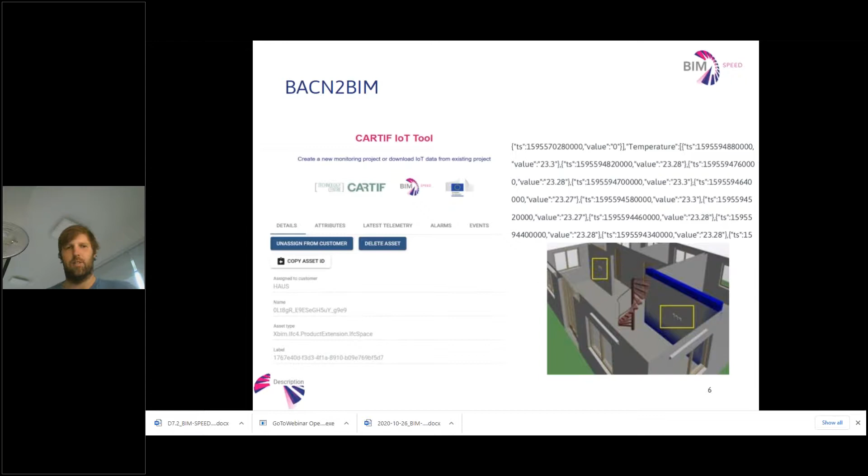We have a GIS data provider, which you can use, and that's already integrated in the BIM-SPEED platform, which you can use to connect to different GIS data, pull different GIS data according to your project location onto the BIM-SPEED platform, and then you can work with this data further in GIS applications.

We have a crowdsourcing tool to collect inhabitants' input. So basically you can create questionnaires for people that they can answer. Is it too warm in this room? Is it too loud? And so forth. We have some questionnaires already developed. We believe that crowdsourcing might be a really good way to collect additional data about buildings, to understand how they're used before the renovation.

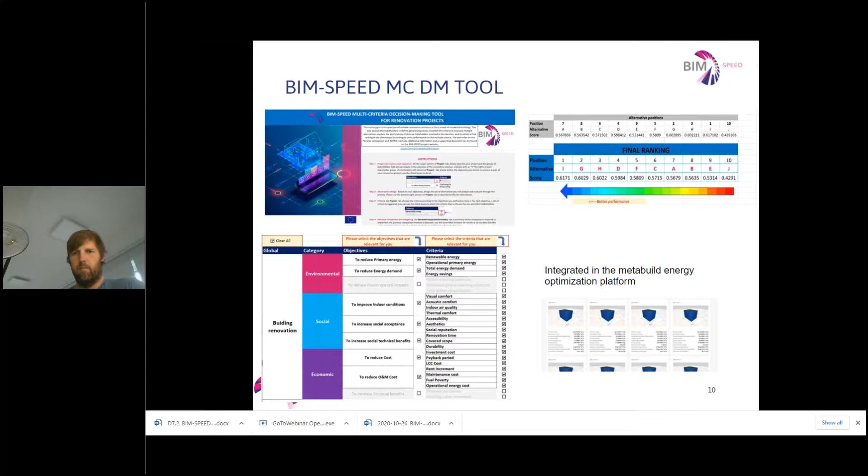This is a multi-criteria decision-making tool, basically where you can select your decision preferences. You see the criteria on the left corner on a project, and then you can rank different alternatives according to the criteria and the weights of the criteria. We've integrated that already into the platform of one of our partners, MetaBuild, who has a building energy optimization tool available.

Because we don't have so much time, this was just a really broad overview. I would have liked to talk more about these, but if you're interested, contact us. We are developing more, so this was just a brief overview. We are looking for people who want to use them, and we are working on really integrating them bit by bit into the BIM Speed platform to create this common information highway.

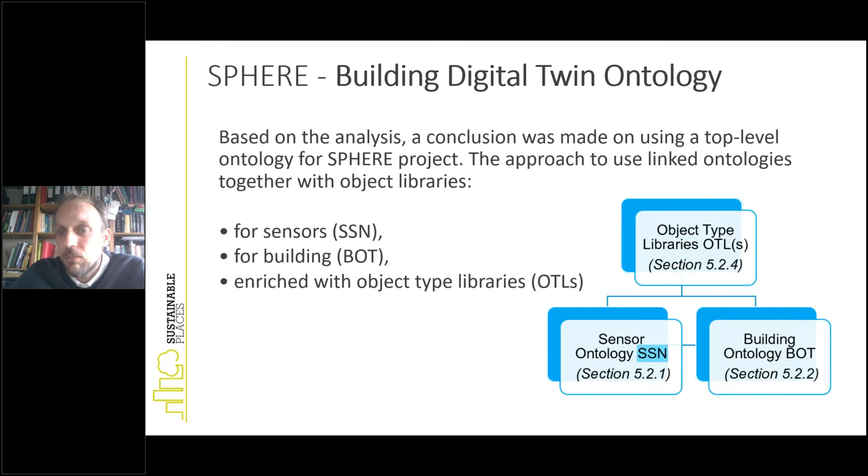That's the ontology developed by the SSN, which was developed by the World Wide Web Consortium. The selected ontology has also been sourced from the World Wide Web Consortium. That's the combination of ontologies our specialist has provided for the properties of the platform, trying also to link that with the Common Data Environment initiative from buildingSMART.

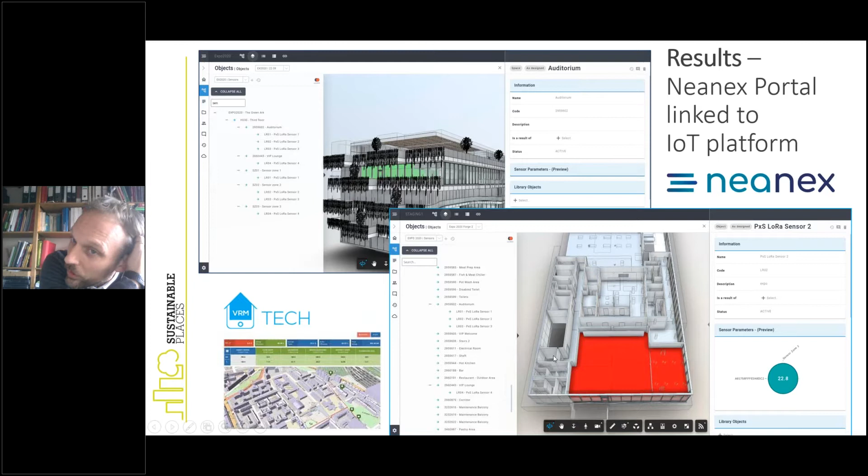These are some screenshots from the platform, and the result is that the Neanex portal has been linked to the IoT platform of VRM. Here's a small capture of VRM Clarity, which can also support CityGML, and based on the Neanex portal we have this link. We'll have more of this in future months.

In terms of the creation of the building digital twin—let me say this is the last point—I'm personally working to try to get the first Building Digital Twin Congress in Barcelona in April 2021. That's not confirmed yet, but I wanted to mention it at this gathering. Here you have more information, and thank you so much.